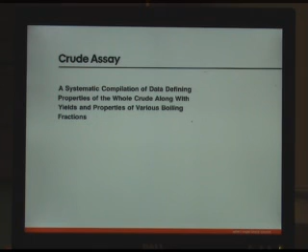Like we said, I showed you before, almost 96% of an oil is hydrocarbons, basically. And it's a complicated mixture, and every region and every country has different qualities. There are no two crude oils alike, and even within the same oil field, you'll see different qualities of the oil, and over time the oil will change in its quality. So the word crude assays, it's a way to describe the qualities of a crude.

This is the second time I missed out.

I have an example on my desk, I forgot to bring, of what is a crude assay, which is all the work that goes into analyzing and describing the qualities of a specific crude. And it gets more complicated if the crudes are these worldwide, internationally known crudes, like the Saudi crudes, for example. Saudi Arabia produces 11 million barrels of oil a day. Remember I said globally we produce about 75 million. So you can imagine how much oil they produce. And so the Saudi crudes, the Saudi light, medium, and heavy crudes are well known worldwide. And so they have a very elaborate crude assay workup.

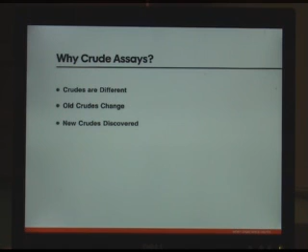So a crude assay describes the different crudes, the types. As I said, a crude oil does change in quality, and then there's always new crudes being discovered. Every time they drill a well, the crude comes out, it's got different qualities. And so you need to analyze it and specify the properties in order to be able to put a value to that crude. So we use the crude assays, this book that describes the qualities of a crude, to define its properties, and that will dictate how I store it and ship it.

It describes the value, how do I price it as a function of its product structure, quality of products, as there are some graphs that will show the variety. It defines processing requirements, does it have too much light ends, too much heavy ends, and how do you process it, and the composition of a refinery that will process these oils. And then it certifies the crude for the manufacture of certain products.

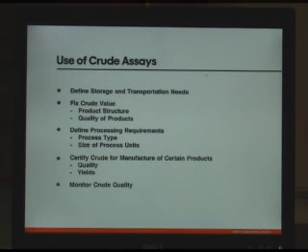Not every crude oil you can use for producing lube oils, for example. You need very special quality oils for producing lube oils. And the same thing with asphalts and asphaltenes. Not every crude oil will produce a bitumen that I can go and use for paving roads and asphalt shingles and things like that. You need very special types of crudes that have the qualities. And then again, we need to monitor the quality of the crudes on a daily basis.

The refiners actually get a blend of different crudes, and they blend it in such a way that they try and keep a consistent recipe so that I can keep all my units full. Because if you've invested in these assets, billions of dollars that go into designing and building a refinery, you want to make sure you're paying back your investment. And in order to pay it back, you have to make sure all the units are full so that you're utilizing that investment to the maximum ability.

So this is how I produce this crude assay information package that I told you about. It's basically a book that has all the qualities of a crude oil. So they take a barrel, run it through a laboratory that evaluates all the different products, and it produces what is known as an assay program. It goes all the way from how do you explore it and produce the oil, to how do you ship it with the different properties of the crude, how do you manufacture, if you run this crude oil through different processing schemes, what kind of products do you produce and the qualities, what environmental issues are associated with this crude, and then shipping and S&D.

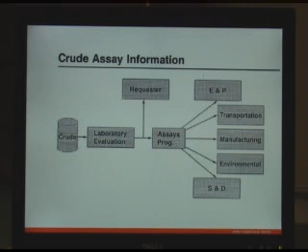I think it's... I need to look up that word, what do they mean by S&D.

Some of the characteristics now of the whole crude as a whole. You've got properties, for example, gravity, and as I said, we measure it by this interesting unit known as API degrees, and that goes into pricing the crude. The lighter the crude, so crude oils that are in the 30, 40, and 50 API gravity are very light crudes. Those will have very high values of $60, $70, $80 a barrel.

The viscosity, is it easy to ship? If the viscosity is very high, that's more indicative of a heavy crude. So you'll see that the prices come down. Sulfur content, I think, is very important because the products and the quality of the products will then have these sulfur components, which means I have to process these products a little bit more and invest more money into producing these finished products. So the higher the sulfur, the more processing and environmental requirements I need to process this oil.

Carbon residue, which is the heavy end of a crude oil. And that really gives me an idea about how much asphalt and heavy fuel oil potential we have in the oil. And then you're left over with some special things like salts and nitrogen and minerals, nickel and vanadium that poison the catalyst. And it's important that we know that beforehand so that we can specify types of catalysts that are resistant or that can be rejuvenated in order to be able to process the oil.

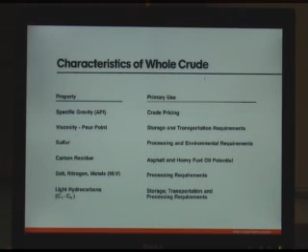But because we have this gas, on these platforms, those pictures I showed you earlier on, sometimes you can't burn it and you can't inject it back into the well. So what they'll do is they re-inject it into the oil and ship it with the oil. And so on the receiving end, these oil companies end up getting this oil that all of a sudden has what they call, you'll hear the term, spiked with condensate. It produces a condensate off the compressors. And what do I do with the condensate? It's liquid. It will dissolve in the oil, so I just blend it with the oil and ship it with the oil. Okay? So you always have a little bit of lightness.

Getting back to the specific gravity, generally it's a measure of the gravity of a component. A lot of you probably understand the gravity of water. Specific gravity is really a ratio. It has no units. It is the ratio of the weight of a fixed volume, whether it's a liter or a cubic foot, of the oil or a hydrocarbon or anything basically, relative to the weight of the same volume of water. So that's why hydrocarbons have like a 0.8 specific gravity. Bricks will probably have maybe, I don't know, 5 or 6. Some of the heavier components, like mercury, have a specific gravity of 13.7, something like that. So 13 times the weight of water. That's indicative of how heavy it is or light.

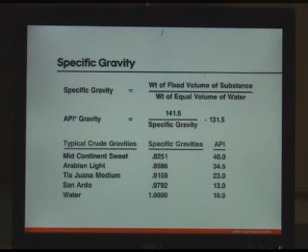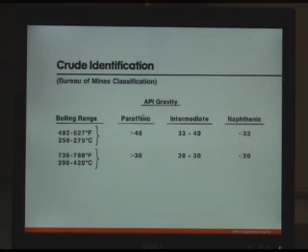These are different boiling ranges for these crudes and the gravities. So what we call intermediate, different boiling ranges and the API gravities. We can move a little faster through these slides.

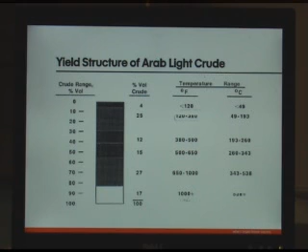Here's a composition of a typical oil, and you can see this is light Arabian crude. And we specify each what we call a cut. Remember the LPG up on top, that's 4 volume %. And that's all the oil that boils up to 120 degrees. And then the gasoline up to 380 degrees. And then the kerosene, jet, and then diesel up to 650. And then gas oils, heavy gas oils up to about 1,000. And then asphalt is the 1,000 plus. That's really your asphalt product.

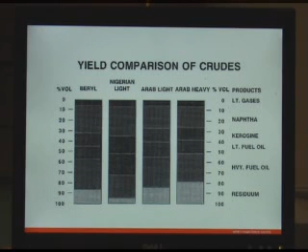These are different crude oils. You remember I was saying different crude oils have different mixes. And look at the amount of resid, typically, because that's the lowest value. So this will probably have the higher dollar value, and that will have the lowest dollar value because you're buying a low quality oil is what it amounts to. And that's Arabian heavy. It's got 20% resid, which is things that boil above about 750 degrees.

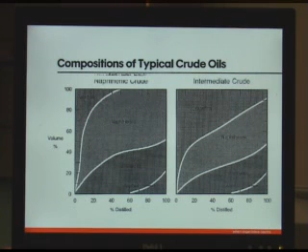Another way also from the crude assays, they break it down by different components. Up on the right-hand side, this should have been colored paraffins. Okay, and then you have naphthenes, which are these rings, but they're saturated. This is all still saturated. And then you go into the aromatics down below, and then the polyaromatics, or the much more, which is asphaltenes. And you can see different crudes have different qualities.

Regular coke produced from these intermediate, all these other materials, will go for maybe 10, 20, what we call the petroleum coke or power grade. They use it for power plants and so on. And the reason is because naphthenic crudes have very low sulfur content, while the intermediate crudes have very high sulfur content. So that sulfur ends up in the coke, and the coke then has low value because you have to process it and you have to treat the flue gases and so on.

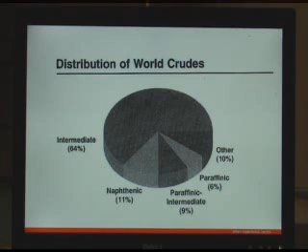These are different properties of different crude oils, all the way from Beryl all the way to Arabian heavy. And you can see the API. But even though the API seems to be getting lower, look at the sulfur content. Sulfur weight percent, 0.42. So Arabian heavy goes all the way up to about 2.8. There's large volumes of Arabian heavy, but then the value, that crude oil, if the market today is at 58, 59, Arabian heavy will go at maybe about $40 a barrel, because it's a heavy crude and it's got too much sulfur in it.

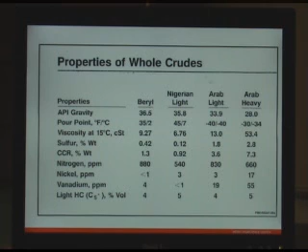Okay, and it covers a wide variety. There's about some 20, how many volumes are there now? There used to be about 20 volumes. The hydrocarbons alone, I mean, it's not just refining applications, it's got a lot of other applications to the ASTM standards. At least 2 volumes of them are just dedicated to testing procedures for petroleum products. Okay? In the old days, we used to actually plot the boiling range from 0 to 100 volume percent against the boiling temperature. So you boil some and you measure the temperature, you boil some more and you measure the temperature, and you come up with a curve.

Now it's getting automated, and so we have what is known as simulated distillation, which actually uses a weight basis. So it's important for the guys in process to know the difference, because when you get these tests, you have to know, well, okay, that's a test, but what type of test? And then when you get into the heavy end, a lot of these components would crack into smaller and lighter components when you boil it over certain ranges, like 700 degrees. So we have to apply tricks, like basically lowering the pressure as you boil it, and then make adjustments to what the boiling temperature is to be able to produce this complete curve.

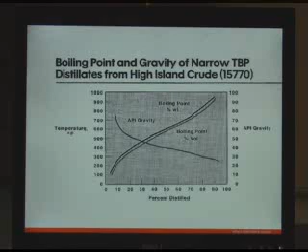And then we plot it against the gravity, the API gravity. And this is critical when the engineers are trying to simulate and model the product qualities and these oils in designing crude units and atmospheric distillation towers and vacuum towers. So this is really one of the key data points that we use for designing refineries.

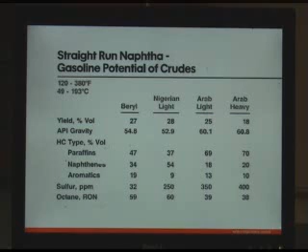That's another breakdown of the different hydrocarbons, and you'll see there's always looking for this, what we call a PONA analysis. It's paraffins, olefins, naphthenes, and aromatics. Obviously there's no olefins in here, so it's just PNA, and that gives you properties of typical straight-run naphtha. Now look at the octane of straight-run naphtha. This is the naphtha, or the gasoline components, that come straight off a crude unit. Okay, that's present naturally in the crude oil. And you see, look at the octane rating is somewhere between 40 to 60. You can't sell that. I mean, you put that in your engine, it'll be knocking all the time. You'll be complaining. You'll think there's something wrong with your engine. There's really something wrong with the fuel. Okay?

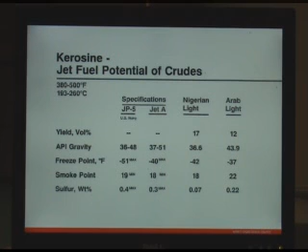And what's the significance of the test is that it tells you how much impurities are in this product. Okay, so the lower the impurities, the higher, you know, it goes up to 22. So that's a nice big flame. So there's a lot of light. Okay, and that's the way they test. And that's actually an ASTM test. So that test is described. You'll see the instruments that are used in measuring the flame test. And then, of course, we look at gravities and sulfur. Sulfur is not very key here, because jet engines burn their fuel way up there in the sky. Nobody, at the moment, the government hasn't been cracking down on jet fuels. So you'll see that jet fuels don't take too much treating in a refinery. We just take the cut and you get what you get. Okay?

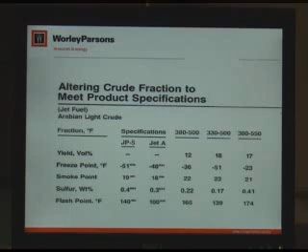There's a temperature, I don't know. Has anybody remembered what temperatures it runs up there? It's pretty cold. I mean, you're down below 40 degrees or so. So if your fuel freezes on you, of course, you won't have fuel going to your pumps, and you won't be able to pump the fuel. So it's a critical specification for jet fuels not to freeze at these high altitudes. Okay, so that's really an important specification.

I don't understand why it's not very popular here in the States, because you go to Europe and I would say maybe 40% of the cars are diesel engines. I've got a funny story. He's not here, so I can tell the story. A friend of ours went to England, rented a car, and went around England touring, and he ran out of gas. He went to the gas station, filled up the car with gasoline, came to turn the engine on, and the engine wouldn't go on. That's when he called AAA, of course, to come and check the car.

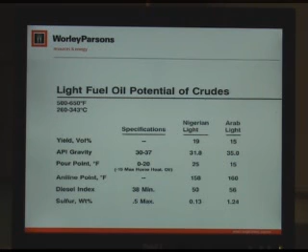Okay. And again, when you ever go rent a car in Europe, make sure you know what kind of fuel it takes. They don't have the nozzles like we have here. I don't know if you've pulled out a diesel nozzle with green on it. I don't know if you noticed they're labeled differently. But the diesel nozzles don't fit in a gasoline tank, it won't go in. So you can't dispense diesel into a gasoline car. So they're a little smarter here in the States as far as dispensing. Part of it has to do with the bellows, that big fat rubber hose that goes over the nozzle. What that is doing, I'll show you later, is sucking the gasoline vapors so that they don't go into the atmosphere. When you're pumping the gasoline in, the vapor is being displaced by the liquid, and so the air is sucked into a vapor recovery system in the station to minimize emissions. So that's important that you know that.

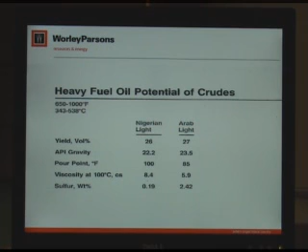These are heavy fuels, different types of crudes. You can see the numbers, they're not identical. You have different pour points. A pour point is a funny test where you fill a tube and you keep cooling it, and you tilt the tube. If you see the fluid still pouring, then you still haven't reached the pour point. You keep cooling it until you get to the point where you can't pour it anymore. So you can see, at 100 degrees you can't pour this Nigerian crude, which means at 100 degrees I can't pump that stuff. So you have to heat it in order to be able to pump it. Okay? Same thing with viscosities. You have to watch out because we use that a lot in moving these liquids around.

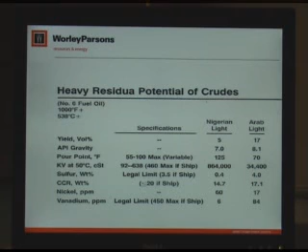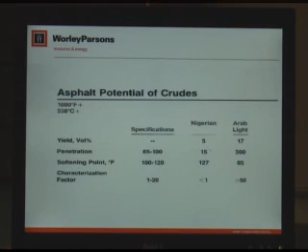These are asphalt potentials in crude oils, and one of the tests that we use is the penetration test and a softening point. Asphalts are used in paving streets, so if the ambient temperature gets too hot, softening point, what happens? At 110, 120, you try walking on asphalt, and you probably feel it sometimes. You're walking, especially with high heels, you find out you're going right through the asphalt. Okay? So these are properties that we need to watch out for.

Product qualities for motor gasolines and distillate fuels. So we're going to take each different product, like gasoline. These are essential products. Now today gasoline is controlled by the government. The government specifies the qualities of the gasoline. And one of the problems we have in California, I think we'll discuss it, I'll get to it.

So we look at octane qualities, because the octane numbers and ratings are important for the value and the price of octane. We look at the volatility. Motor gasoline engines actually use spark plugs, and so the volatility of a gasoline is important so that the spark ignites the fuel. Oxygenates have a lot to do with the emissions of a fuel. And then additives. I was up at the Valero refinery. We were working on taking MTBE out of gasoline.

I don't know if you all remember, a few years back, one of the ways of adding oxygen into a gasoline component was adding a chemical called MTBE, methyl tert-butyl ether, that had an oxygen content of about 2.8%. And we blended it with the gasoline. And so we were putting in this blending equipment, and right there, this is a Valero refinery, right? And we go up to the area where they're shipping all their gasoline out to all the different users, and there are these little additive tanks that had BP, it had Chevron on it, it had Unocal 76, and what it meant is that each oil company had their own additives.

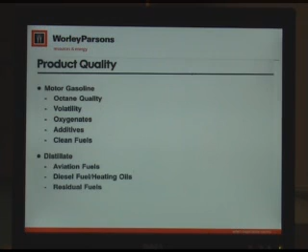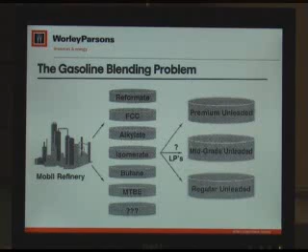On the fuel, is it stable? Is the octane stable in your tank of your car? Octanes, I said that last week, really. As I said, look at this composition here. Here's gasoline blending. A refinery has a reformer, it's got an FCC unit, it's got an alky unit, it's got an ISOM unit. These are specific units that take